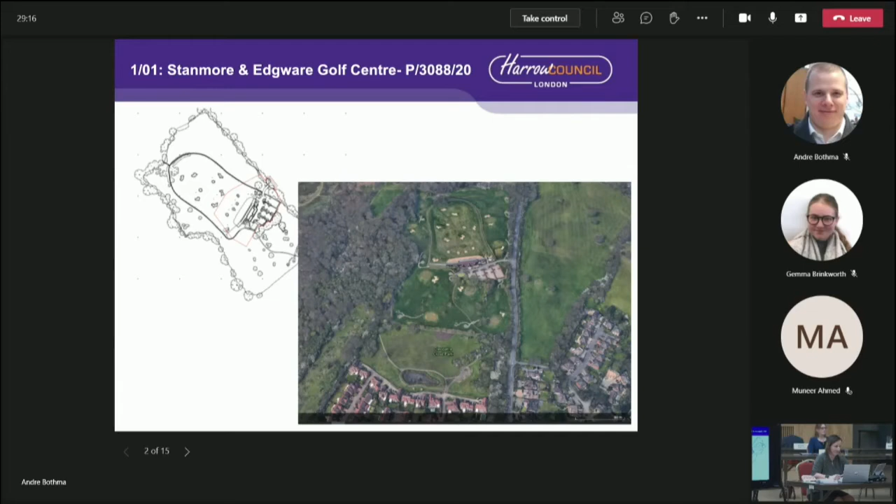So just to outline the red line site here, it relates to just the former golf club building, the area of hard standing and immediate soft landscape around the building. The application, the borough boundary runs down Brockley Hill to the east, with the London Borough of Barnet situated to the east of the site and Harrow on the western side. The entire site is designated Greenbelt. The Stanmore Country Park and Pearwood Conservation Area is located on the western side. There is an archaeological priority area which runs down the eastern part of the site and partially through the application site.

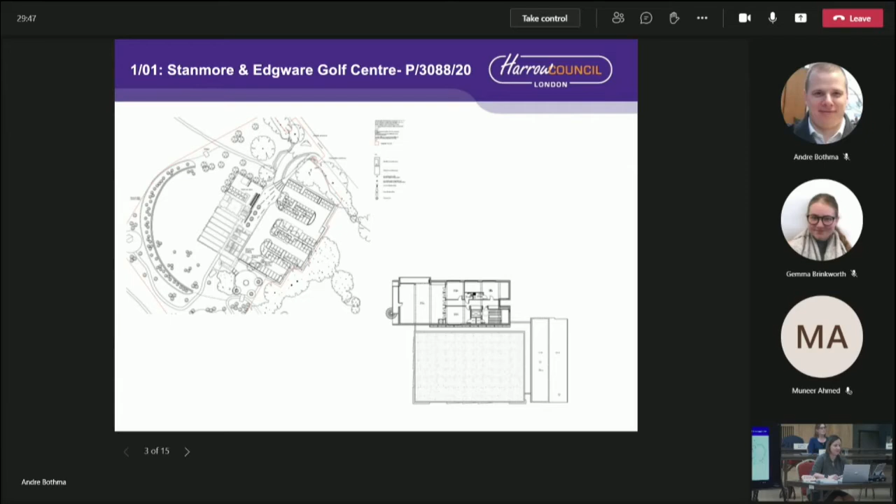So the proposal is for a part single-storey building to provide a banqueting facility together with a car park, as well as associated landscaping and alterations to the site access on Brockley Hill. The building has been subject to an extensive fire at the end of summer 2020, in which much of the building has now been destroyed and only the remaining frame of the building and hard standing is currently on site.

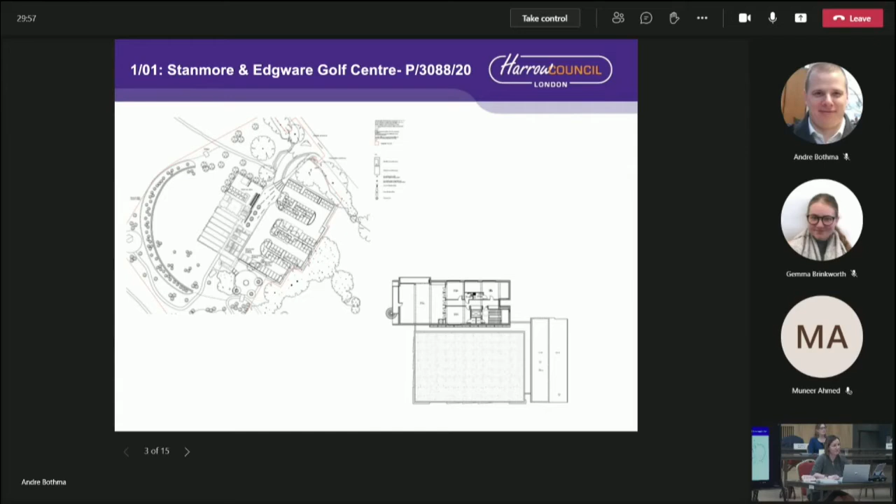In terms of consultation, we have undertaken 2 rounds of consultation, and to date we have received 612 objections.

There are 3 main issues in terms of the principle of development. That relates to impact on Greenbelt, development outside of the town centre, and provision of sports facilities.

In terms of the first issue, Greenbelt, there is only one applicable criteria in the NPPF which is relevant to this case in terms of new buildings, and that is that the development needs to be on previously developed land, and it needs not to have a greater impact on the openness compared to the existing building on the site.

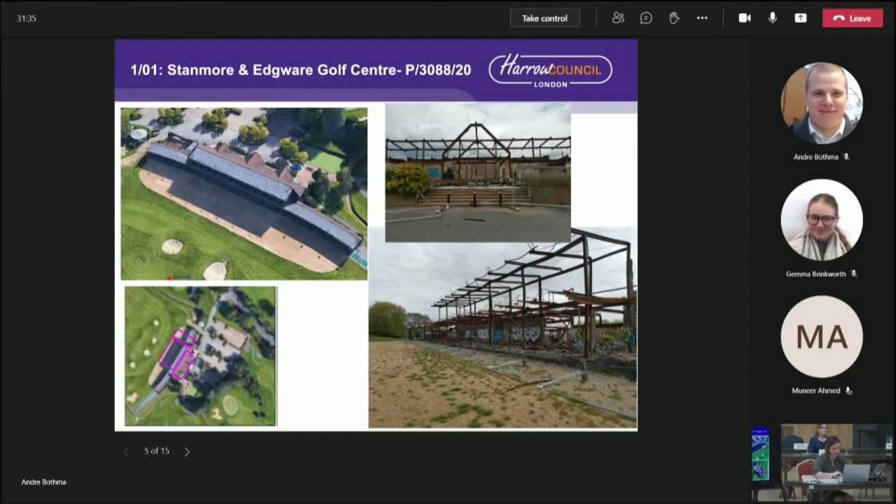The second requirement relates to impact on openness. This requires a comparison between the existing and proposed site conditions. However, the applicant's assessment is currently based on the pre-existing building form, and so for that reason, officers haven't been able to take into account an accurate assessment in relation to the fire damaged building and the proposed building.

But nevertheless, based on the site observations, given that much of the external walls and the roof are no longer present, in officers' opinion, the structure is now much reduced in the landscape, both in terms of its spatial and visual impact, and would have a much greater...

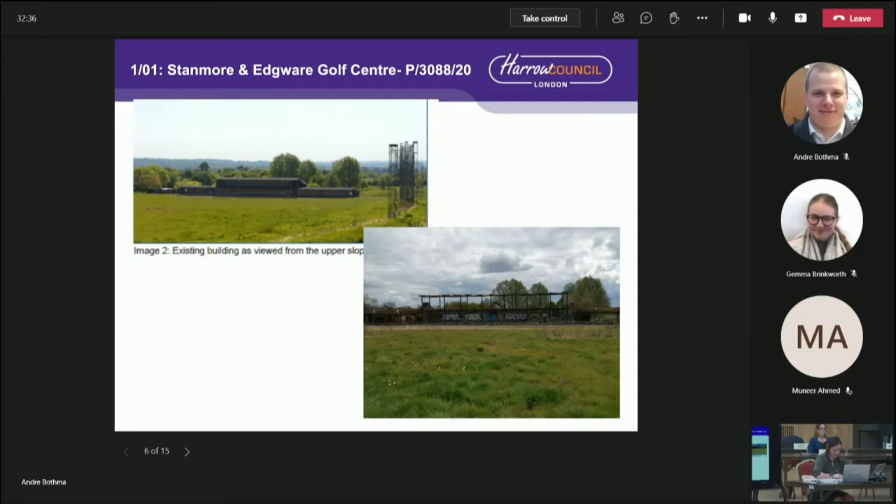The application is supported by a landscape and visual impact assessment. Here you can see two images which show the development from outside, from longer distance vantage points. It's well screened by mature trees and vegetation, and it's accepted that the proposed development wouldn't be visible from these longer distance views, even taking into account the fire damaged building.

However, in more localised views from within the site, the landscape and visual impact assessment does note that the former building was clearly visible and prominent from within the site. But again, the assessment is based on the pre-existing building form, and as you can see now, the current building on site does have a very different landscape character.

So although the building would have a more compact form, nevertheless, given it would appear as a solid developed mass, in officers' view, it would have a much greater visual presence and impact on the openness of the green belt.

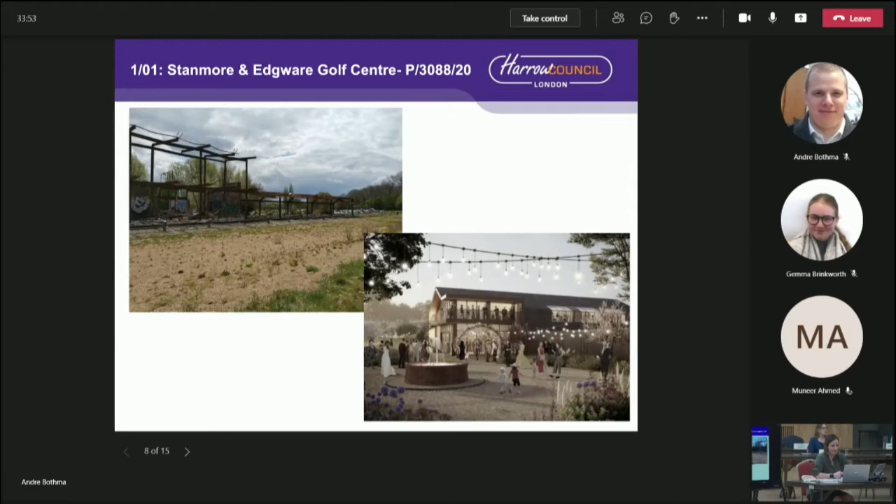In terms of the change of use of the land to be used as a banqueting facility, the NPPF does allow for change of use in the green belt, but that's subject to tests of not conflicting with the purposes of green belt and not impacting on openness.

Although it was considered there was potential for some conflict with the purposes in terms of dealing with urban regeneration and urban recycling, to address that the applicant has submitted a sequential assessment which considers a number of sites within Harrow, as well as the adjoining boroughs of Brent, Hertsmere and Barnet, and no alternative sites have been demonstrated.

So in terms of the change of use element, that is accepted, but nevertheless the issue of impact on greenbelt openness remains an issue. The applicant hasn't put forward a case of very special circumstances to justify a departure from the policy in this case.

The banqueting facility, in officers' view, would have a very limited community value as a private business. It's not fundamental to the health and well-being of the community, and it doesn't fall within the definition of a community facility within the local plan.

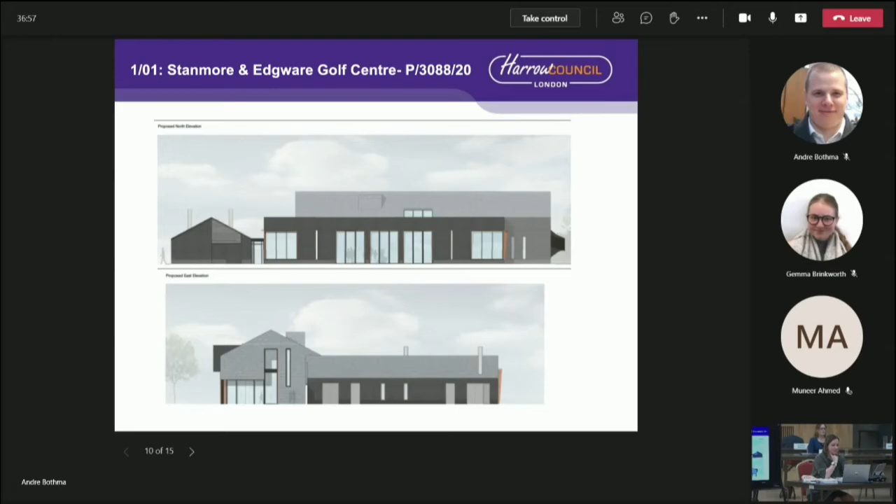The application is accompanied by a noise impact assessment, which considers the operational noise in relation to the banqueting facility, as well as people entering and exiting the venue, and conversation at the back of the site. That has been reviewed by the Council's Environmental Health Team, and they consider the report to be acceptable in that there would be no adverse impact, subject to conditions to ensure that the windows and doors on the banqueting facility remained closed, and also subject to an operational condition on hours of opening.

Turning to traffic and parking, the application has been reviewed by the Highways Authority. Overall, the Highways Authority consider that the highway network would be able to accommodate the number of vehicular trips associated with the development, but nevertheless they have concerns over the risk of overspill parking, both in respect of Harrow and Barnet residents. Overall there would be 62 visitor parking spaces and 16 overflow parking spaces, and that is considered to be insufficient for the larger scale events of capacity up to 500, which could occur on a regular monthly basis.

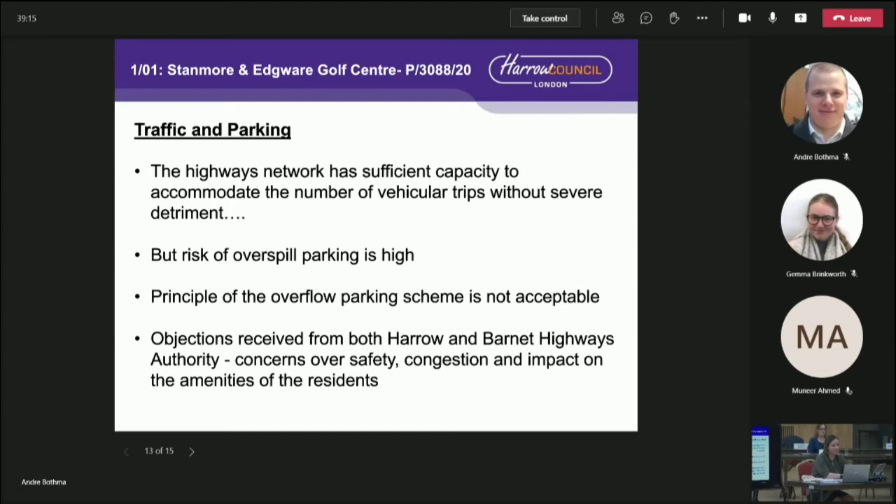The application has also been reviewed by the Council's Biodiversity Officer. It's considered to be overall deficient in terms of biodiversity net gain requirements, and it failed to take into account the application's red line area and the wider ecological network.

An archaeological assessment has also been submitted in relation to the archaeological priority area. This has been reviewed by the Greater London Archaeological Advisory Service, and they have outlined that the proposal is deficient because a fieldwork evaluation must be undertaken due to the potential heritage assets of high importance that could be located on or around the application site. So in this respect, the proposal hasn't demonstrated that archaeological assets wouldn't be harmed.

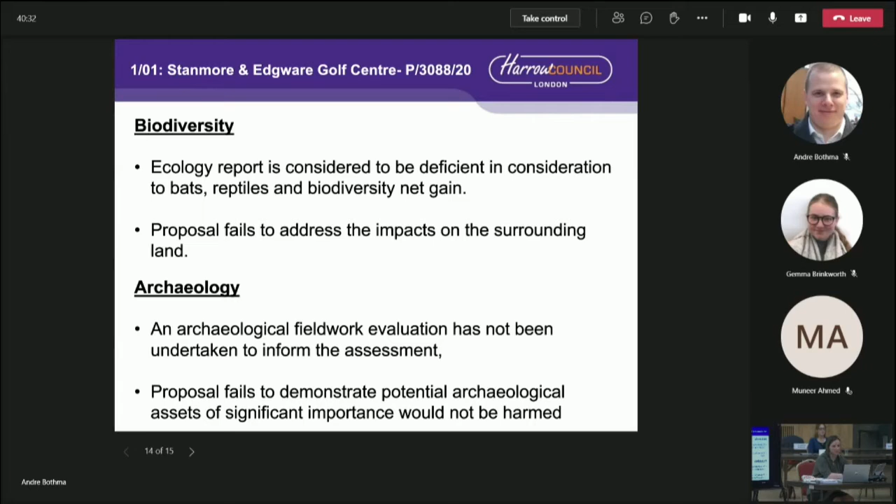So currently the Planning Committee is asked to refuse this application for the reasons discussed: the applicant has failed to address that the proposal wouldn't have a greater impact on greenbelt openness, the failure to provide adequate on-site car parking facilities, an inadequate archaeological evaluation and biodiversity assessment, and it hasn't been demonstrated that there could be alternative sports provision to meet the borough's needs.

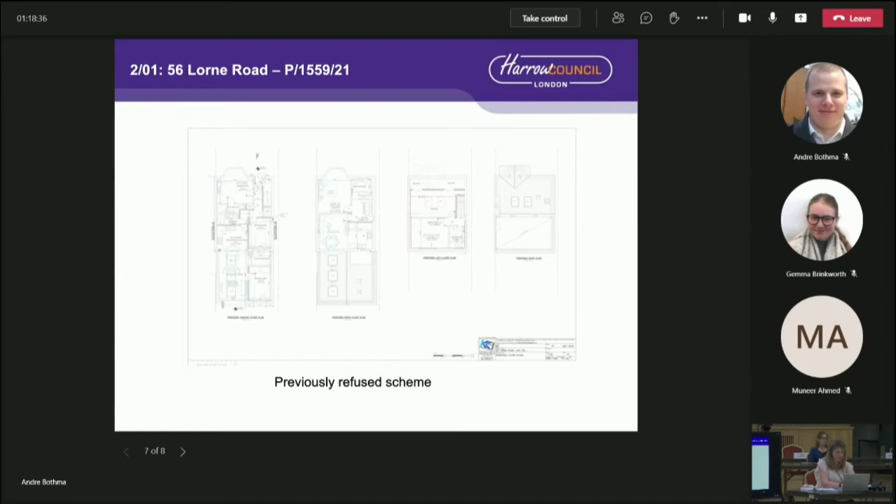On the screen at the moment is showing the previous scheme, which showed the stacking of a bedroom above a kitchen, which was unsatisfactory, and the width of the side access was shown at 500mm. Before the committee this evening, the application has sought to address those issues.

A site visit to the property has determined that the side access way is indeed just shy of 1 metre wide at 0.97 metres, and that width is sufficient to ensure bin and cycle storage could be brought up and down the side access way as needed. Secondly, in terms of like for like, the stacking arrangements have been addressed accordingly on the plans.

In total for this planning application, we've received 5 objections following the consultation that we carried out. The objections raised have been addressed on pages 104 and 105 of the committee report and within the officer's appraisal where material planning considerations have been raised.

The flats meet the London Plan space standards overall in terms of sizing, and therefore officers are satisfied that the quality of accommodation is appropriate and in accordance with the development plan in this regard.

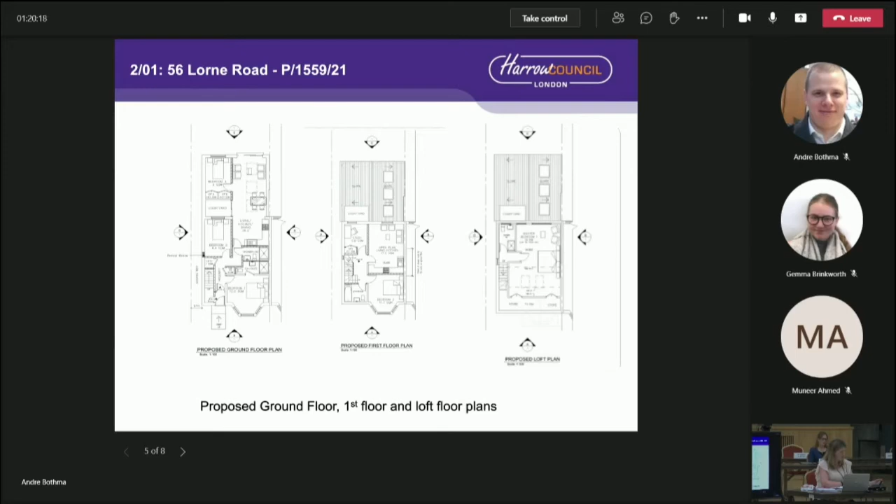I'd just draw your attention to the addendum which clarifies that the development isn't car-free as such, rather following consultation with the Highways Authority, due to the location of the site and the capacity in the surrounding roads for additional car parking, there would be no requirement from the Highways Authority to ensure that this proposal would be resident permit restricted.

Overall, there would be 4 cycle spaces. As you can see on the plan in front of you now, there would be 2 spaces for each of the flats located in the rear garden.

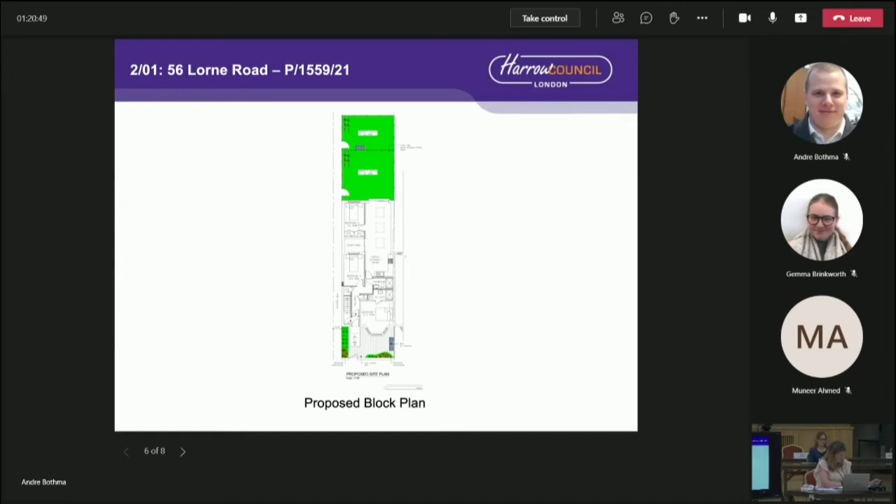The bin storage would be split between the flats, with a couple of bins within the rear garden of the upper floor flat and additional provision at the front, which is where other premises in the street scene keep their bins. Some of the objections raised relate to the loss of the front garden wall.

Overall, the principle of converting the dwelling is acceptable. Character and appearance and residential amenity have been addressed in the report, and we've recommended approval. I'm happy to take any questions if you have any.

Thank you. Do we have any questions from members? No? Okay.

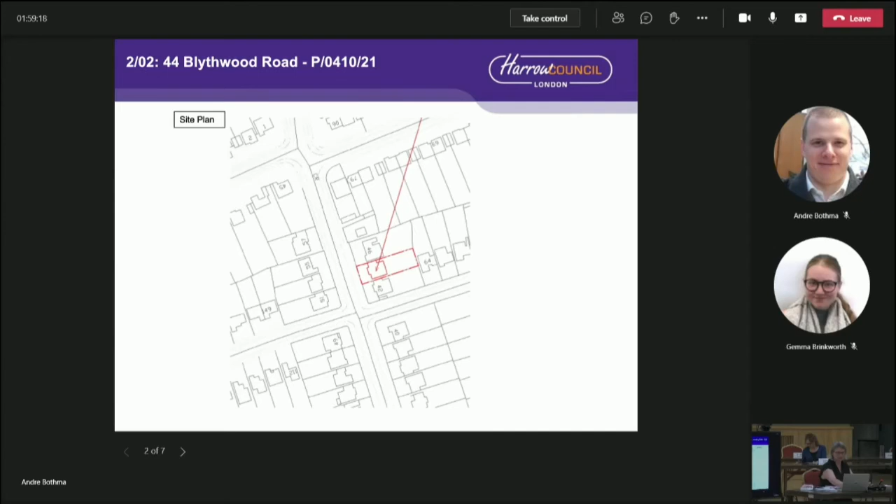The application is in relation to a 2-storey detached house on the eastern side of the road, in an area of similar properties. The proposal before you is for extensions to that property, to convert the existing garage and for a two-storey side extension on the footprint of the existing garage, infilling the porch and a rear dormer. The proposal is in relation just to increasing the size of the existing dwelling house.

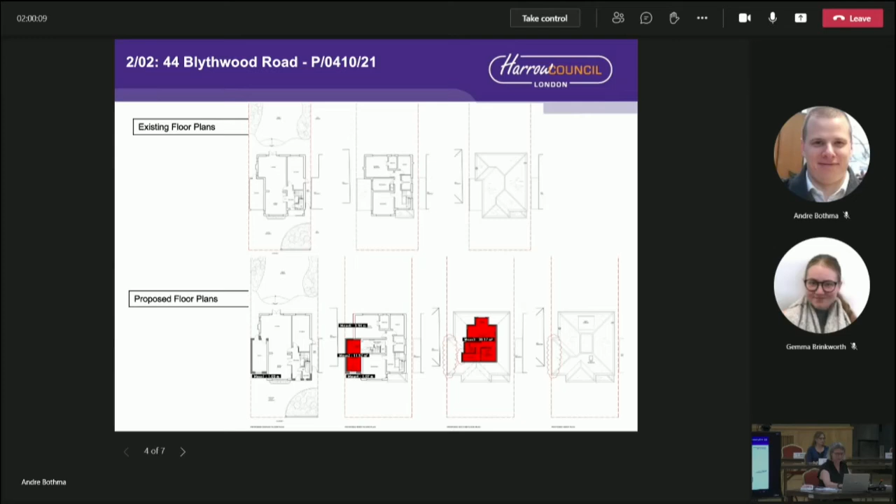The application has been considered in the light of the supplementary planning documents and guidance, and is considered to be acceptable in its appearance and in terms of its impact on the amenity of neighbours, and is recommended for approval. I'm happy to take any questions.

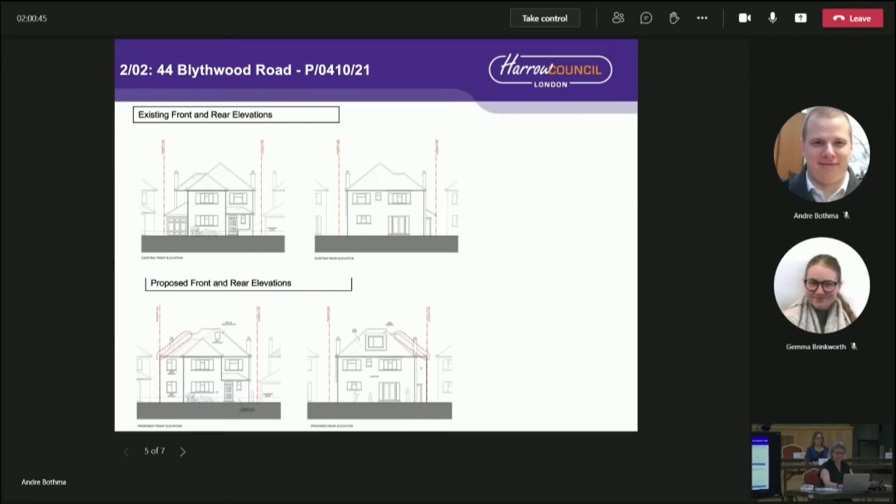Evening, everyone. My name's Alex Osborne and I represent Mr and Mrs Pearce at 46 Blythwood Road, who are the neighbours to the property. I'm a chartered environmentalist and environmental consultant, just as a bit of background.

You've seen our objection letter and we're disappointed with your intention to approve the extension plans at number 44. Our concerns still remain. We feel that by allowing building to the boundary on two stories, you are encouraging development of properties very close to each other, which is out of character with the existing suburban setting of this area.

The London Borough of Harrow contains a wide variety of housing types and residential settings, and whilst we appreciate that Harrow's design guide has to cover all of these, there should be consideration given to each setting. Development guidelines that may be suitable for central Harrow and other densely built areas within the borough should not necessarily be applied to more sparsely developed tree-lined avenues such as Blythwood Road.

In relation to our concerns regarding the foundations of the proposed extension, during conversations with the Harrow Planning Department regarding this application, we were informed that due to the current pandemic, site visits weren't being made. We would like assurance that if you were to grant these proposals, the building regulations team will be visiting the site during construction and ensuring that any existing or new footings for the extension are suitable and that there will be no risk to number 46.

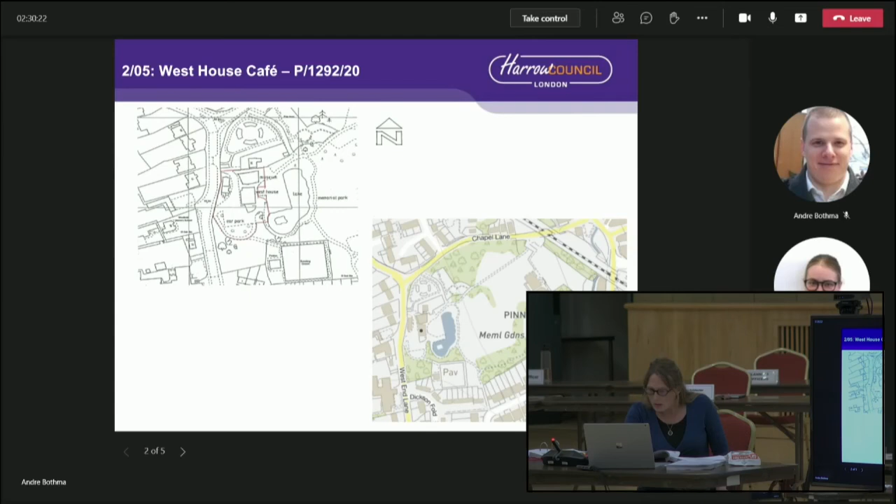Okay, so just to review here, here's the full extent of the park, and we are looking at an area right here. So just to go back to the photos to give you the visual, this is the existing terrace. From this angle, it looks like the existing terrace is smaller than this area, but it actually is a little bit bigger.

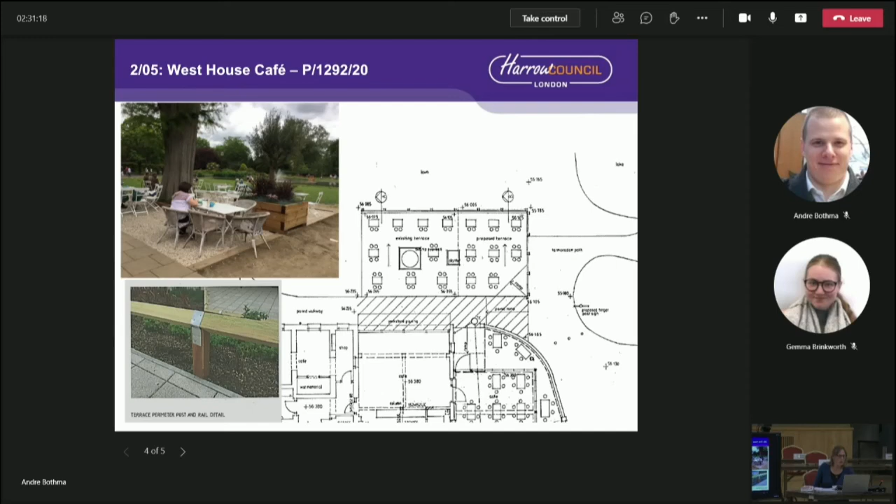If we go to the plans here, this shows the existing terrace. This is the proposed part, the extension to the terrace, which comes up against the tarmac, which leads down to the path, which goes here. There is a pathway here, which is outside of the development — it's not changed or has nothing to do with the development. There is a pathway here, which again goes round, which the development does not interfere with in any way.

So what we are looking at is just infilling this bit of area here, which does not form a pathway. My question was how much space is left for people to walk in between the new development and the lake, which is sort of right on the border, am I right? Yeah.

So all of the existing formal pathway, none of it will be changed. It is only the grass, which people tend to walk across here, that would be built over, but the formal pathway will not be changed in any way.

Question to Marilyn, maybe on the comment that's been made — this is quite DM18 and DM1. What is your view in terms of refusing on that ground? It is a balanced decision, and it will be for members to determine whether or not they wish to refuse it on those grounds. I think officers have concluded differently in the overall context, which Kimberly has set out in her presentation and in the report. It is a departure from the local plan, but there are reasons why officers believe that can be accepted. Members are entitled to take a different view on that.

Because I do believe we need to protect our parks, and obviously in terms of cafe and sitting area, I think we all like to sit down and have a bit, but there's a limit up to which we can go into the park area to try and facilitate that. So, okay.

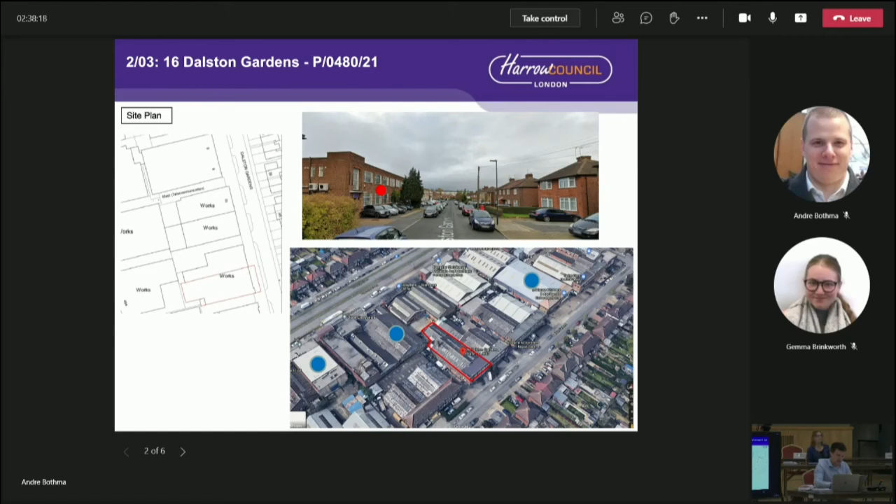The ground floor footprint does not change, however the internal configurations are altered as part of the snack and food manufacturing operations that will commence when the first floor extension is complete. This does not require planning permission as it falls within the permitted use of the site. The first floor extension amounts to 470 square metres of additional floor space.

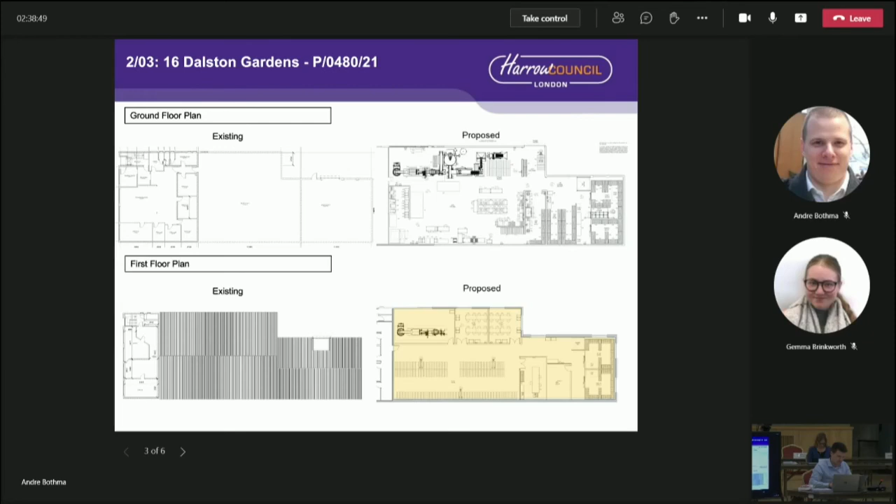There are no highway objections as the extension would create minimal additional trips to the site. Any additional noise created by the additional floor space is considered commensurate with the strategic industrial location. Importantly, there is no change to the front elevation, which means the bulk created by the proposal is within the height and width of the existing building within the street scene, and therefore would not impact on the character and appearance of the subject property and locality.

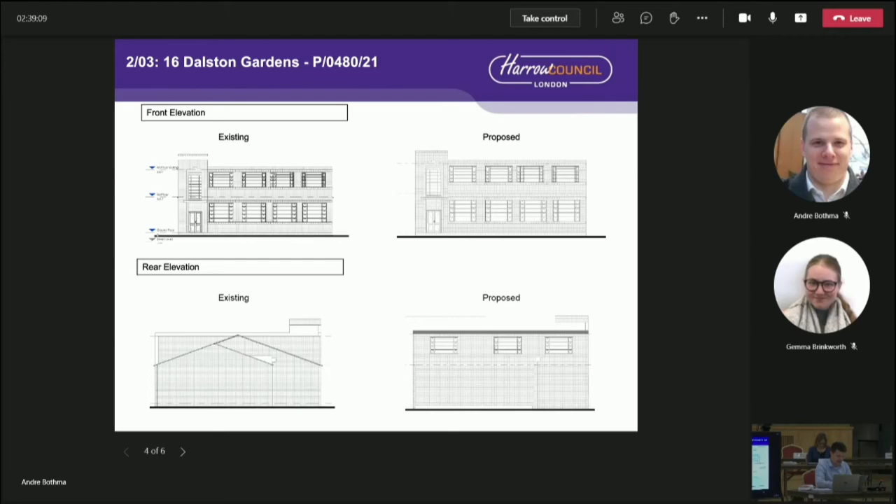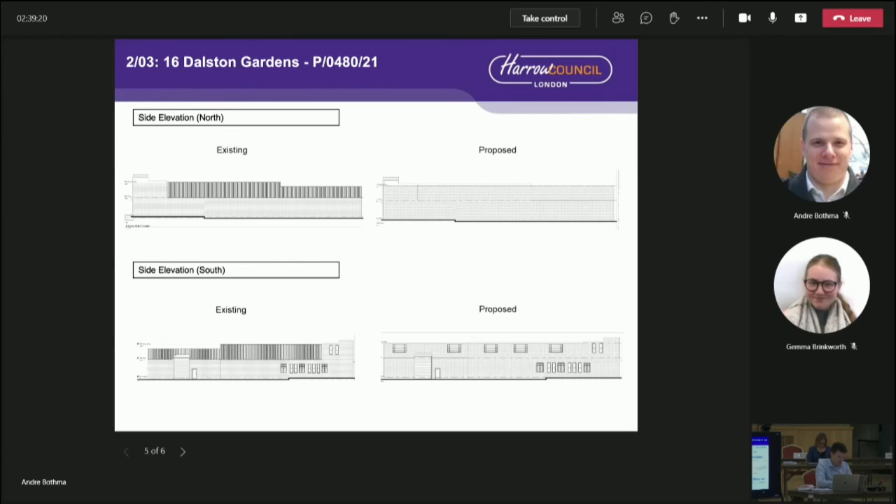The rear elevation changes clearly show the change of pitch roof to flat roof form. The side elevations also show that the proposed heights are within the current ridge height of the main roof. Based on the planning considerations I've highlighted and as confirmed on the slide, officers consider the proposal compliant with the relevant planning policies. This concludes the presentation and members should consider as officers' recommendation. Thank you.

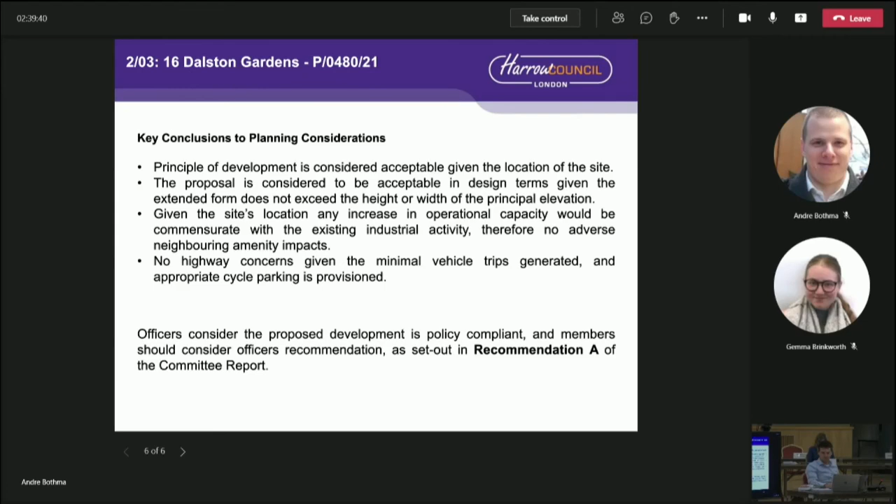Thank you very much. Any questions? Nothing? Anybody? No? So shall we move straight to the vote then?

Yes. Those in favour of the recommendation to approve planning permission subject to the conditions? Unanimous. Okay, thank you. So the decision is to approve planning subject to the conditions listed. If we move on to Park Drive, 2 Park Drive.

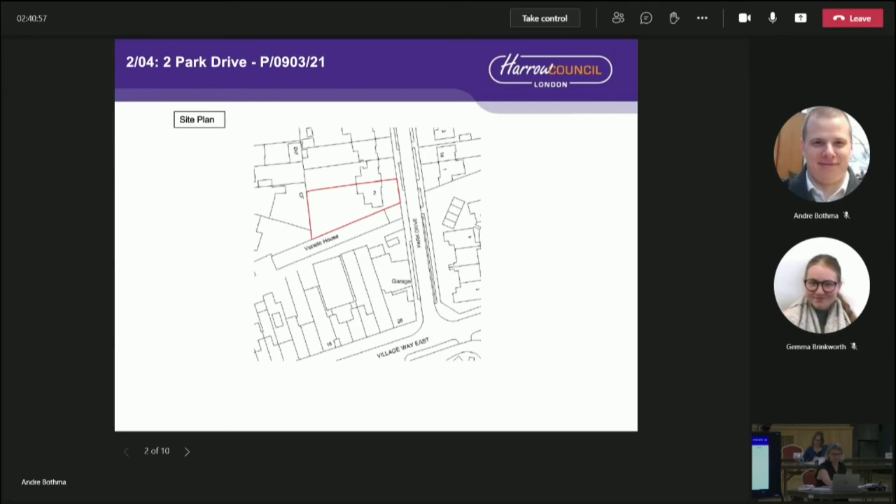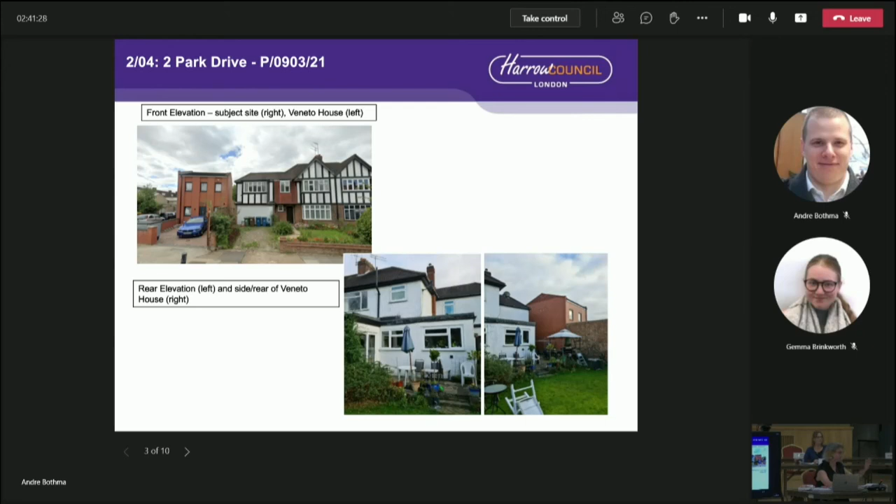But the existing building joining it, let me go back—oops, going in the wrong direction—has a really long building to the rear. The flank walls of those are imperforate. You can see on the overhead, the long orange building is that extension that I just referred to.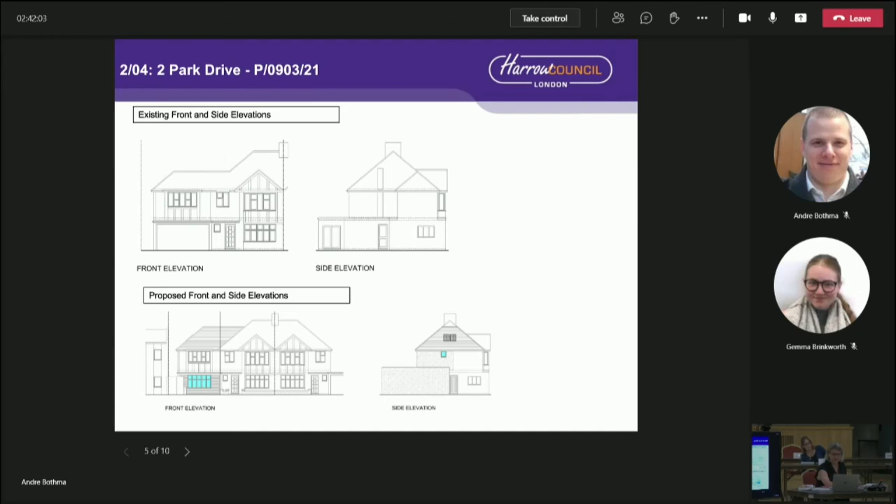So you'll see here the existing elevations at the top and the proposed elevations. You'll notice there's a slight change in the ridge height of the side extension, but it's basically in keeping with what's already been done, and the conversion of the garage and the frontage there, Councillor Perrick, as you asked in briefing, will match the existing frontage.

And the rear elevation. The comments were noted, I hadn't realised that the slide had translated when you said the side and rear elevation. And we do apologise for that. Generally, I can get that right. It wasn't you, it was a test to see who'd read the report.

So the extensions in and of themselves are considered to comply with design guidance. The reason why that is relevant is in terms of the garden land policy, in terms of providing additional accommodation on what is effectively garden land. In and of itself, these extensions, were this to remain a dwelling house, would remain the same. Therefore, it is an exception to garden land policy.

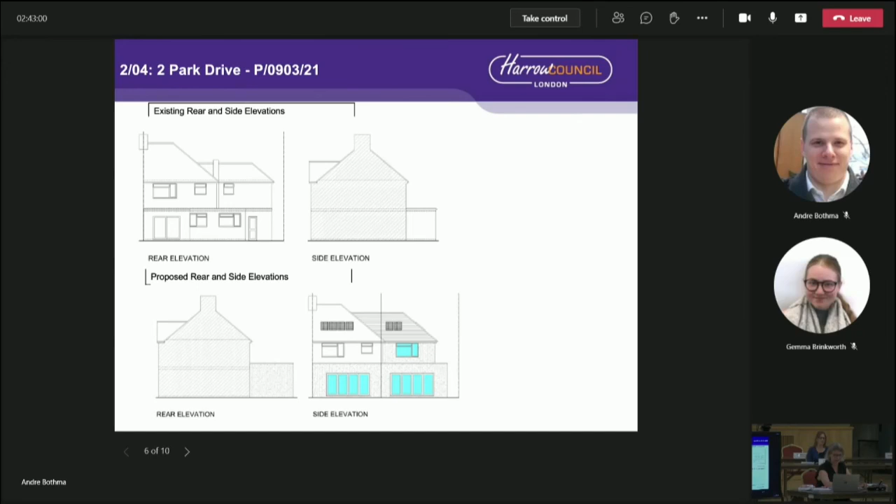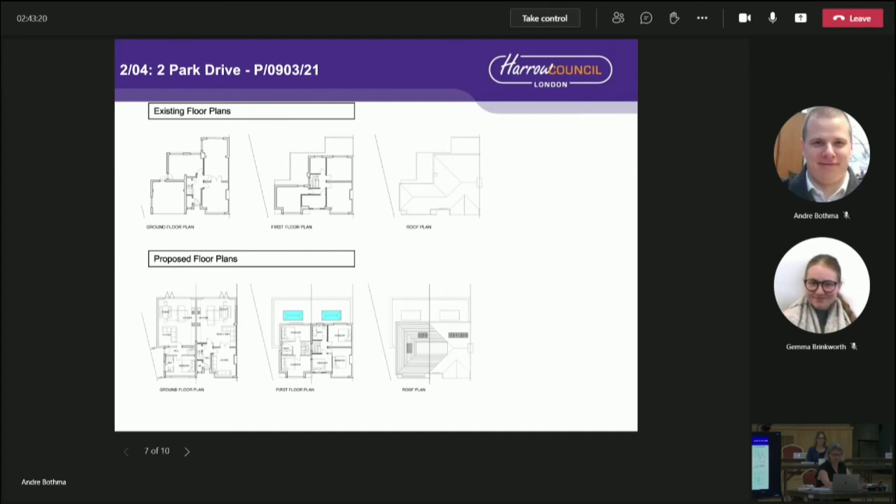The houses themselves both meet London Plan standards and provide a good quality of accommodation. One parking space is provided for effectively the new house. Highways are satisfied that that is appropriate in this area. It's a PTAL 4, and the existing on-street parking situation would not be exacerbated by this. There's a little bit of a block plan showing how the parking works.

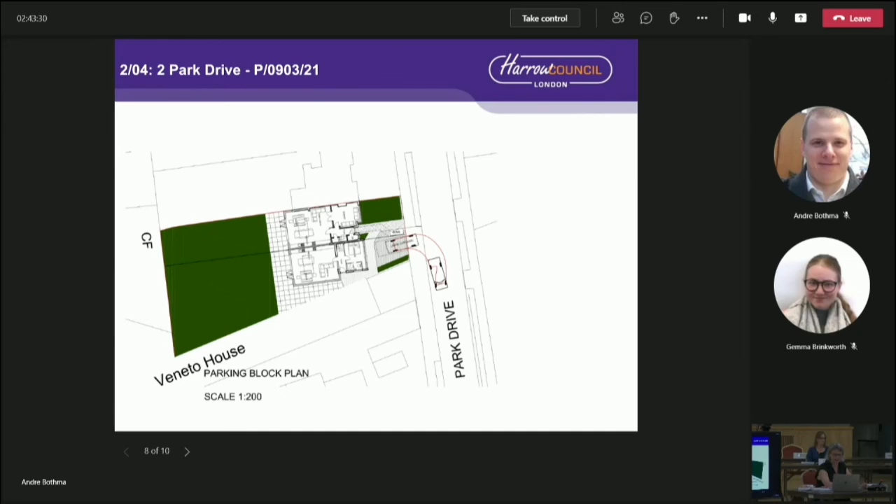Thank you, Beverly. Any questions? Yeah, comment there. Yes, I don't think we're going to be in the Guinness Book of Records for this one. I shall be very brief. I think this is completely acceptable and see no reason to refuse it. Thank you.

Any further comments? Oh, Councillor Back. Yeah, Chair, it's not actually related to this, but just on the point about the cursor, I don't know how hard it would be for IT to have a different colour on the cursor so it would appear on the screens when we're looking, because on that one it was fairly easy to follow, but on the previous one it was slightly more difficult. If it's a very black and white or faded plan, it's not all that easy to understand which bit the officer's referring to. I will pick that up with IT. I'm sure they'll have noted the comments. It wasn't apparent when we met last time, so we'll see what can be done. Failing that, we could use the old-fashioned pointer. I think we've still got some of those old laser pointers, and use the screens up there, so we can find a way around it.

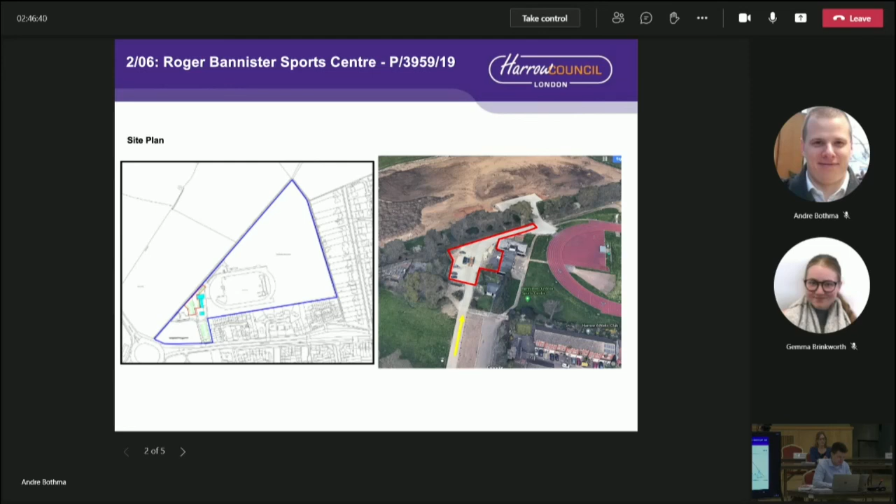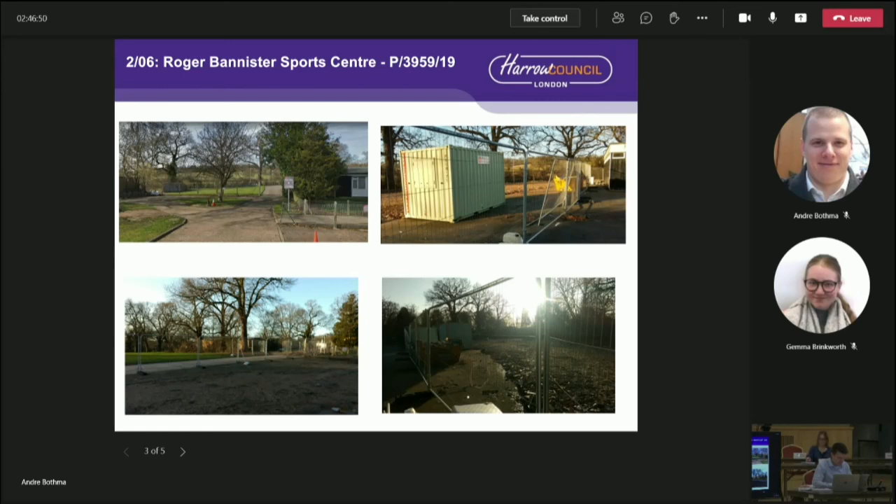The photo on the top left shows a vehicle access route into the southern boundary of the site. All other photos relate to the current construction activities ongoing at the site.

As confirmed, 49 spaces is accommodated within the site. No boundary treatment is proposed as it will be an open area when not in use. All trees within or close to the boundary will be retained. An arboricultural method statement and tree protection condition will be attached to any permission given.

The addendum for this item has added a compliance condition to ensure the Bodpave is maintained throughout the lifetime of the development. Given that the grass will be able to regrow within the Bodpave, being permeable and sympathetic, officers considered there would be minimal visual impact on the openness of the green belt.

The addendum also removes condition 5 that requires a car park management plan, as these details have already been approved in a larger application on the site. These details confirm approximately 37 large events will occur per year, so the frequency of cars in this location will be limited.

On event days, parking stewards are proposed to manage vehicles entering and exiting the site. The highways officer supported the provision of the overspill car park. Furthermore, this area would support the overall parking provision of the wider recreational facilities granted on the site.

These types of facilities are considered an exception to development within the green belt as per paragraph 145 of the NPPF. Therefore, officers consider the proposal would not have a materially harmful impact on the openness of the green belt, the character and appearance of the area, and it would not create any harmful impacts regarding ecology, drainage or landscaping.

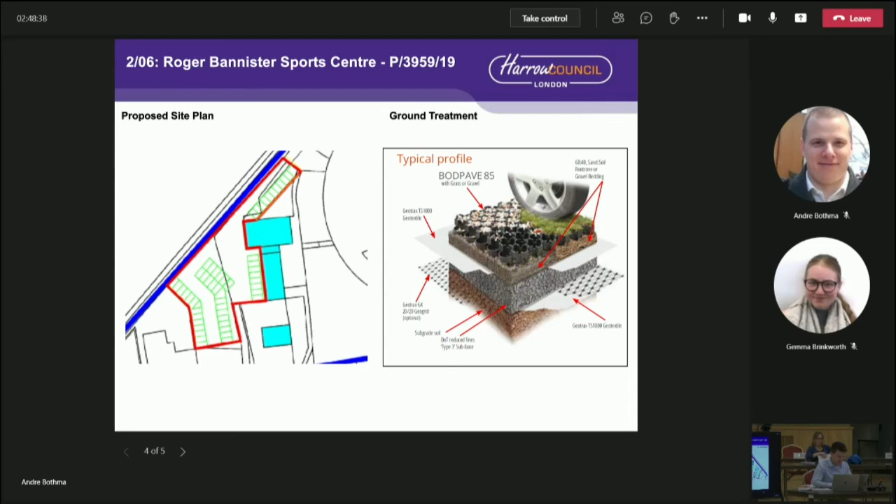Based on the planning considerations highlighted, officers consider the proposal compliant with the relevant planning policies. This concludes the presentation and members should consider officers' recommendation. Thank you. Thank you very much.

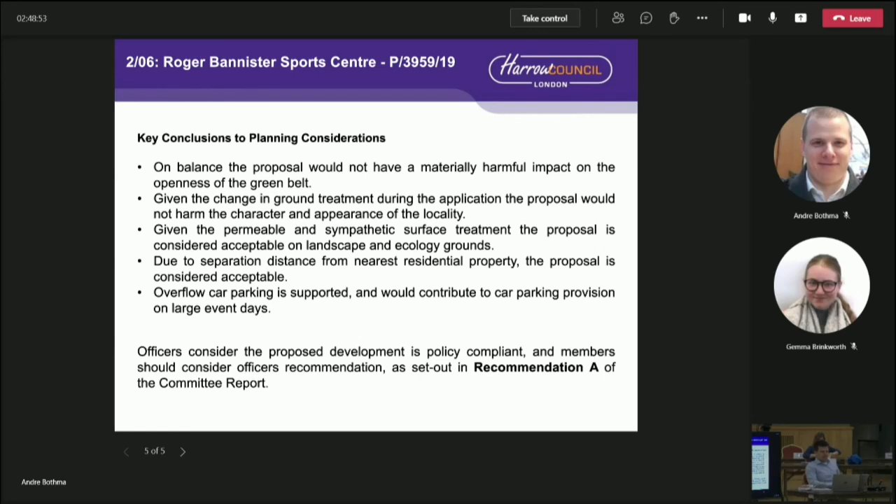Councillor Perrett: Thank you for the presentation. Just one comment on the addendum on Bodpave. Can you please explain a little bit more about the paragraph you put in on approved plans and documents on page 11 of the addendum? And how long would this surface last, and what about maintenance of the surface to the same standard?

In terms of the duration, it's 20 years. Relating to the discussion within the briefing that we had, following on from members' feedback, the compliance condition ensures that it goes beyond those 20 years, so that if it does deteriorate, there is an obligation in terms of the planning condition that continues through the lifetime of the development.

Councillor Baxter: Yes, sorry, it was the same point actually. I asked at the conservative briefing last week about the lifespan of Bodpave, so I just wanted to thank officers for confirming that.

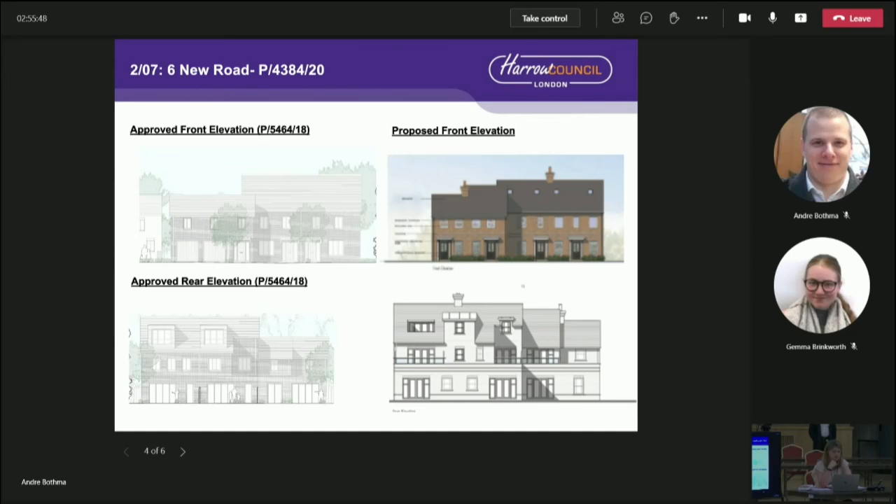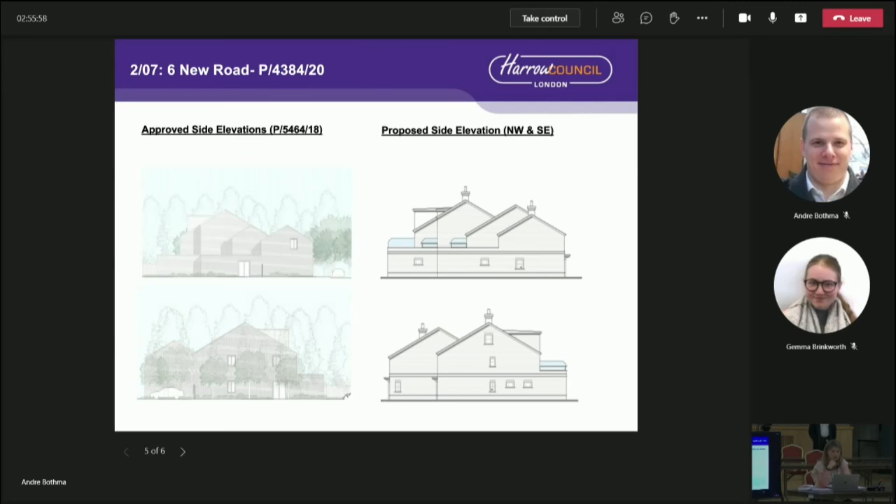At the rear, for the 3 houses, you had 3 individual houses, 2 with dormer windows. The proposal this evening is slightly different in design, owing to the internal layouts of the development being 7 flats, including some terraced areas at first floor level. The slides here just show the existing approved application in side elevation compared to the proposed side elevation, which is before you this evening.

We have received no objections to the consultation exercise that we undertook as part of this planning application. The flats meet the space standards of the London Plan.

One point of clarification regarding the refuse storage at the rear, following briefing, is that the slide has been updated, which is before you. The report at paragraph 6.3.9 refers to the refuse and cycle storage being located at the rear of the site, and that is correct. There's a bin store in this location and a cycle store in this location. However, the submitted details don't show enough bins, so there is a recommendation for a condition which would require further details regarding that, but we are satisfied that there is more than sufficient space within the confines of the site to accommodate the bin storage that would be required, which is 7 bins for each unit for the refuse and recycling.

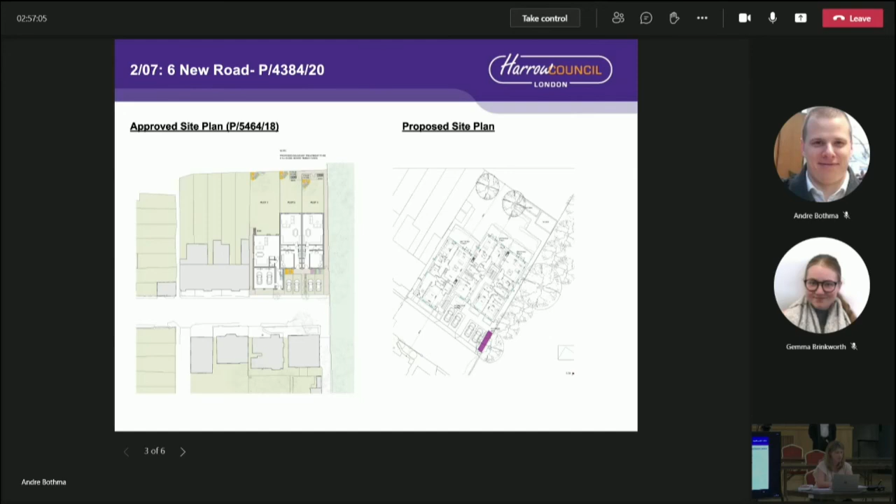In terms of the principle of the development, that is an accepted principle. There is an extant permission on the site to redevelop it. The proposal is considered to be in accordance with the character and appearance of the area. We are satisfied that there would not be an unacceptable impact on residential amenity. As I've mentioned, the standard of residential accommodation meets the London Plan standards. The site is in a PTAL location 3, and there are 4 parking spaces for 7 flats. The Highways Authority have raised no objections to that provision and are satisfied that the proposal would be satisfactory in that respect. We have received no objections from neighbouring Brent Council relating to biodiversity, nor did they request such conditions for the extant scheme. We have attached a condition regarding fire safety, and there are no adverse impacts on development and flood risk.

We have recommended the application subject to a number of planning conditions as set out in the report, and I'm happy to take any questions if you have them.

Thank you, Ola. So, slight concern about the parking space. We're seeing there are 4 parking spaces available at the moment, but if I look at the comments by landscaping and trees on 6.3.6, it says the number of parking spaces could be reduced to provide more soft landscaping to the front of the building. We discussed flooding in the earlier case, and obviously it would be better if there were some permeable landscaping in the front of the house, but that would reduce the number of parking spaces. So what's your comment? Why are we not following the advice from landscaping and trees, what do you advise here from them?